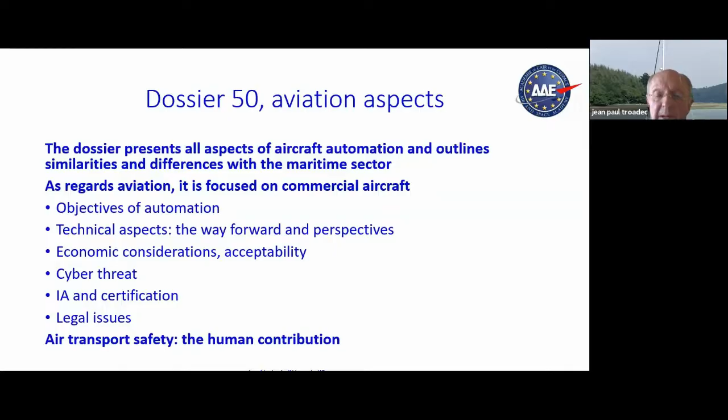As regards specifically aviation, it is focused on commercial aircraft and develops the following aspects regarding automation and autonomy: the objective of automation, the technical aspects, economy and acceptability, cyber threat, artificial intelligence and certification, legal issues, and as regards air transport safety, the human contribution, which will be presented by my colleague Bertrand de Courville after my presentation.

Next slide, please. The objectives of automation are the same since the beginning of aviation. The first is to assist the crew to manage increasingly complex systems and improve access to flight information. This has allowed a progressive reduction of the crew from 4 to 5 at the beginning of commercial aviation, to 3, and then today to 2 crew. The last operation eliminated was that of the flight engineer, thanks to the automation of mechanical systems.

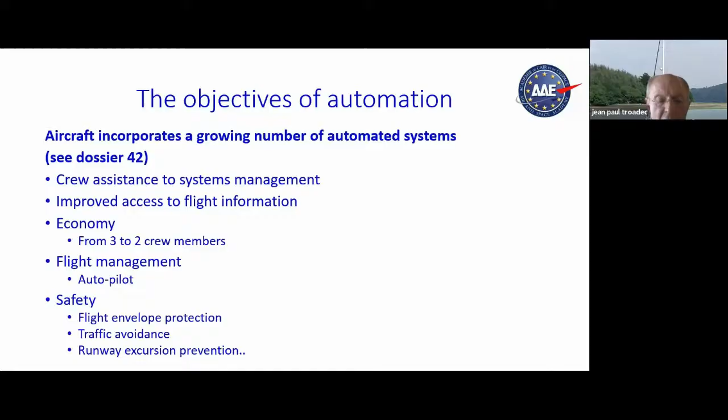Autopilot is, of course, an essential device amongst automated systems. Its functions have been progressively sophisticated, from simply keeping course and altitude to possibly managing the entire flight. Automatism have also developed functions devoted to safety, such as flight envelope protection, traffic avoidance, and runway excursion prevention, as Bertrand will develop later on. Next slide, please.

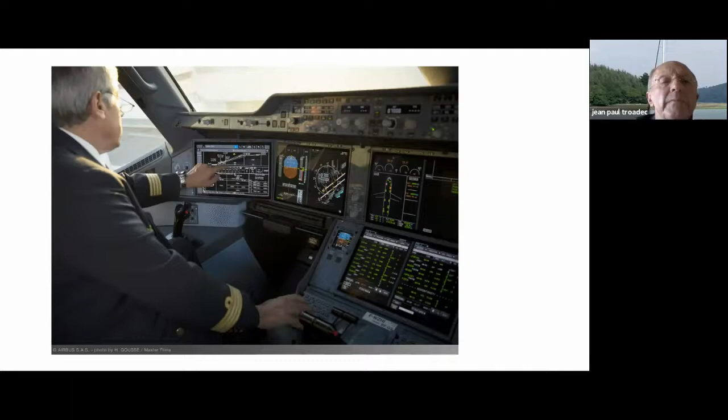Here you have a slide, a picture of the cockpit of the A350, which shows the graphic interface developed for this new version of the Airbus. And you can see the pilot dialoguing with the computer. Next slide, please.

What is the situation of autonomous civil aircraft today? As regards autonomy, the only so-called autonomous civil aircraft flying today are limited to light aircraft. I say so-called autonomous because, in fact, they are flown by a ground pilot. These aircraft are subject to strict limitations as regards their size, the airspace they can fly, with specific training requirements for the pilot, depending on their use.

Many larger drones carrying freight or even passengers are under consideration, but none is presently in operation. Most of them are electrically driven, devoted to urban mobility, and EASA is developing certification rules for this type of aircraft. On the picture, you have a picture of such a helicopter.

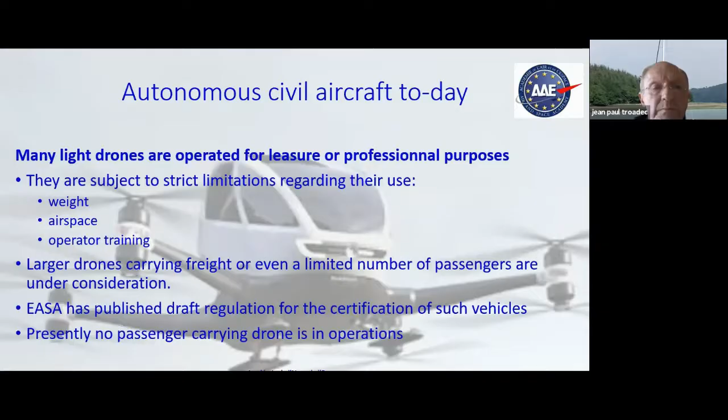Next slide, please. As regards military aircraft, on the contrary, armies still operate large drones for military and observation purposes. Some of them have the size of commercial aircraft. These aircraft fly in a specific framework compared to civil aircraft. They are subject to different certification rules, and they use specific airspace, and of course, they carry no passengers. Nevertheless, we can think that their experience will be useful for developing large commercial drones in the future.

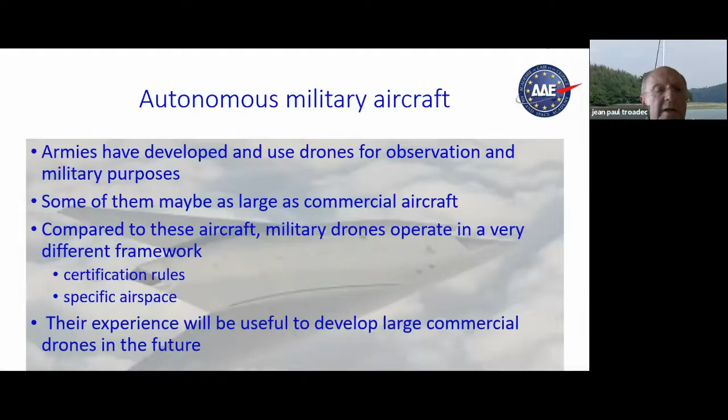Next slide, please. Today, all large civil aircraft are operated by a two-pilot crew. Is it possible to reduce the number of crew to 1 or even 0 without decreasing the safety level?

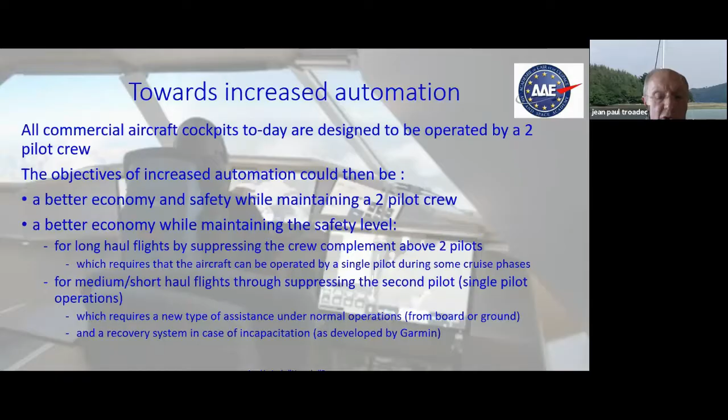Two ways are under consideration by the manufacturers. For long-haul flights, when a crew complement above 2 is needed, the perspective could be to suppress the third man, meaning that during some cruise phases, the aircraft can be operated by a single pilot for a limited time. For short-haul flights, the suppression of the second pilot should require a new type of assistance under normal operation from ground or board, and a recovery system in case of pilot incapacitation, such as developed by Garmin for business aircraft. Here you have a view of what could be a single pilot cockpit.

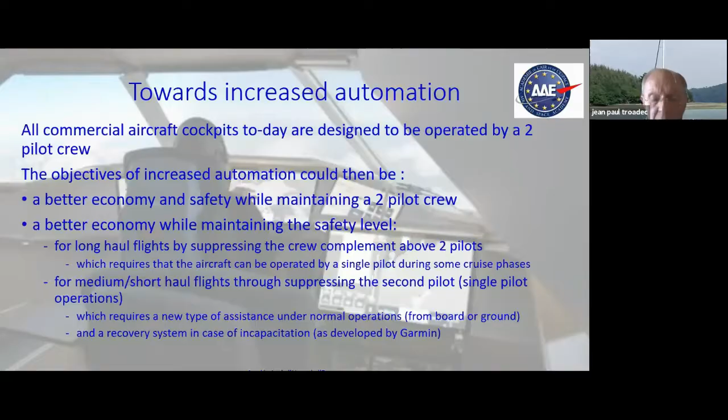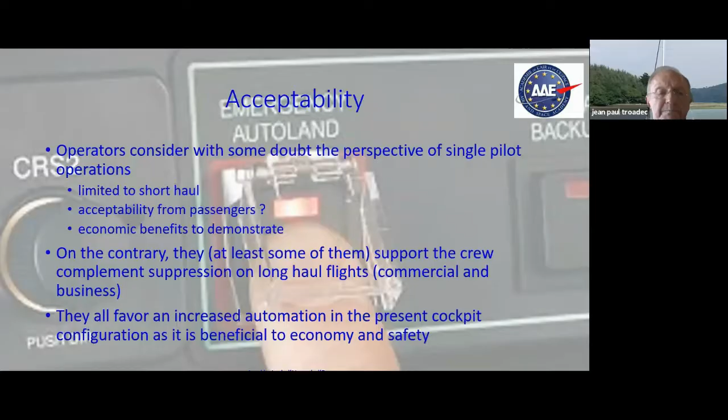Next slide, please. Single pilot operation does not seem to be a priority for most operators, in particular because the economic benefits are not demonstrated and the public acceptability is questionable. On the contrary, some support the crew complement suppression as long as safety is maintained, in which they see an economic benefit and a simplification of crew planning. Next slide, please.

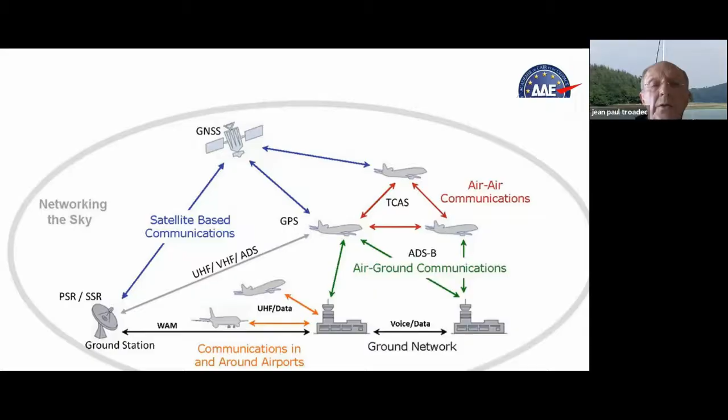This is a graph of the different interactions between the aircraft, air ground, ground station, and satellites, and it gives an idea of the level of threat, because there is a threat at each connection between the ground, the aircraft, and the satellites.

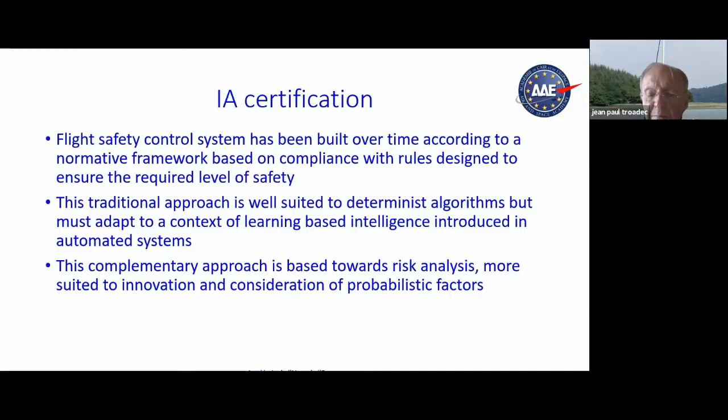Certification. The certification of artificial intelligence is a new problem for aviation, because the introduction of some level of learning-based intelligence, as opposed to the traditional deterministic algorithm approach, requires a complementary certification model. The normative framework based on compliance with rules designed to ensure the required level of safety must be complemented by an approach based on risk analysis more suited to innovation and consideration of probabilistic factors.

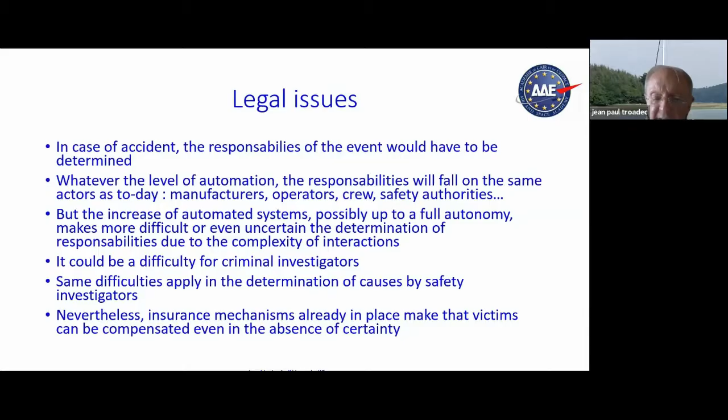My last slide refers to legal issues discussed during the conference. The question is the determination of responsibilities in case of accident, facing the increased complexity of interaction between the different systems and actors. The responsibilities will necessarily fall on the same actors as today: manufacturers, operators, safety authorities, but will probably be more difficult to determine.

This could be a problem in case of criminal investigation, the question being the same for the determination of causes by the safety investigators. Nevertheless, insurance mechanisms ensure that victims can be compensated even in the absence of certainty.

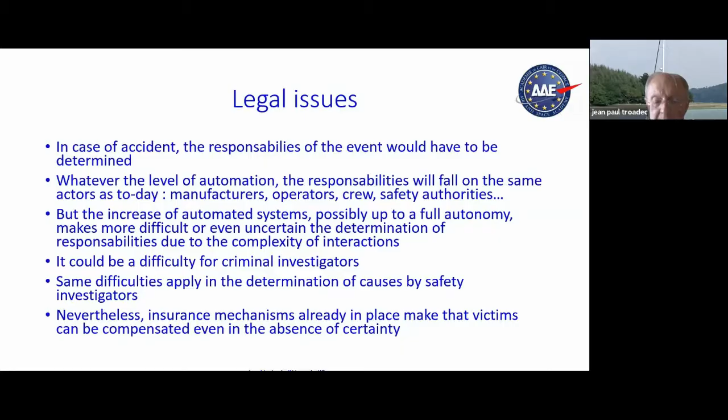My name is Bertrand de Courville, and I'm a retired captain from Air France. I've been flying for 30 years, and I was involved for about 20 years with safety issues at the Air France level and also at the international level. I made this presentation at the conference organized with Jean-Paul.

So when it comes to working on air transport without a pilot, it's good to look at what pilots do, and more particularly, what is really the pilot contribution to safety.

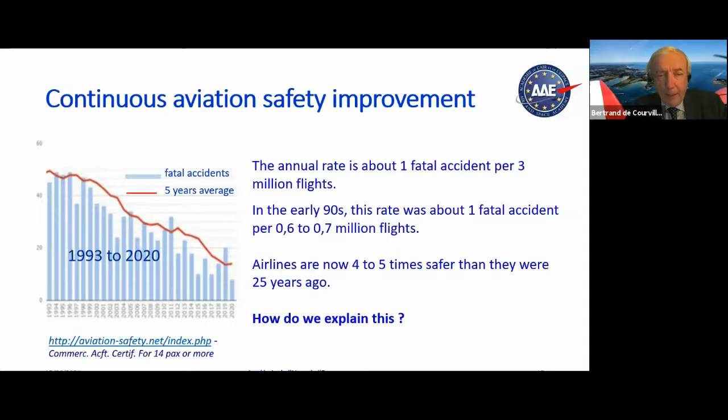What we see over nearly three decades, more than 25 years, is a very significant improvement of safety. Depending on what statistic we look at, airlines are now 4 to 5 times or even more safer than they were 25 years ago. The question is, how do we explain this?

One way to answer is to look at what changed in 25 years and what remained unchanged. About what remains unchanged: airplane reliability, no change. The planes are today as reliable as they were, nearly the same, no change. Failure, anomalies, poor weather are still part of daily operation as they were 25 years ago. Human errors, the same. There are pilots, air traffic controllers, maintenance, and many other actors making errors.

Something interesting to note is that, as it was 25 years ago, the critical safety decisions made in real time, short-term decisions, are made by pilots in flight. It's still the case today. Today, as it was 25 years ago, it's a two-pilot crew, as Jean-Paul mentioned just before.

Something few people really know is that 99% of landings are performed manually. The approach may be flown with autopilot, but in 99% of cases, the landing is performed manually. So every flight is a source and opportunity for training to fly and land manually in any kind of weather, with the exception of fog, where we require auto-land capacity.

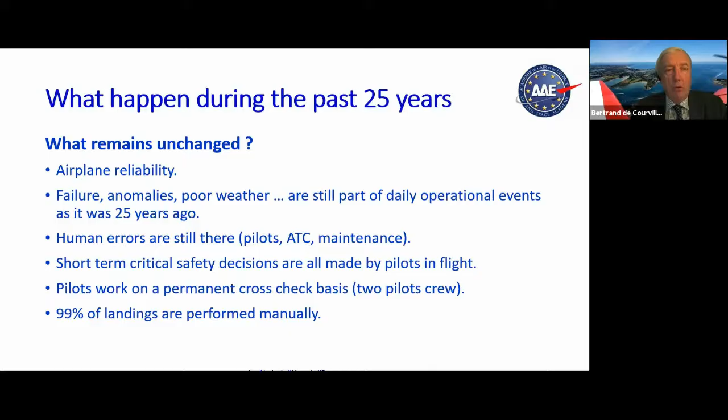So now, what really changed, and what could be the source of this very significant improvement of safety? We have, over these 25 years, really significantly improved the design of decision aids, mostly those related to specific risks, which were the major contributors to accidents. I'll say a few words more about that.

We have much more efficient teamwork today. Teamwork in the cockpit operates on a fail-safe mode, which is part of the concept of every aircraft component, but it applies also to the crew. If one component fails, the other one is there as a backup, and it's the same for the crew.

We have many sources of training that are more and more sophisticated. Initially, we had crew resource management training, as was the case in the shipping industry—bridge resource management. More recently, we have threat and error management, which is a very efficient way of addressing risk at a short-term level in the cockpit. We also have FORDEC, an acronym about how to make decisions in a critical situation, and we train the crew to work together with that, and also to get information beyond the cockpit when needed.

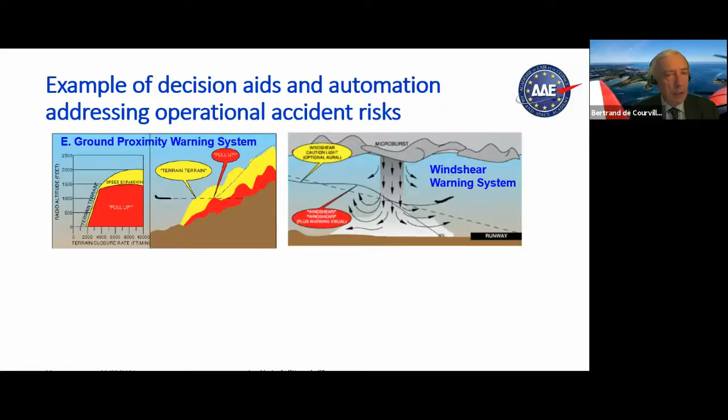We also have an important aid for decision making: the detection and avoidance of wind shear, which is a quite important risk source of loss-of-control related accidents. Wind shear warning systems now equip all aircraft. It's required by regulation.

Also, because those types of accidents are now really reduced, we have to look carefully at runway overrun and what we call runway excursion. There is now different equipment on board to inform the crew when there is a real problem of energy, either at touchdown or in advance, when the energy of the aircraft will be too high compared with the available distance or braking capacity of the aircraft. So it's again a decision aid to go around and try another landing.

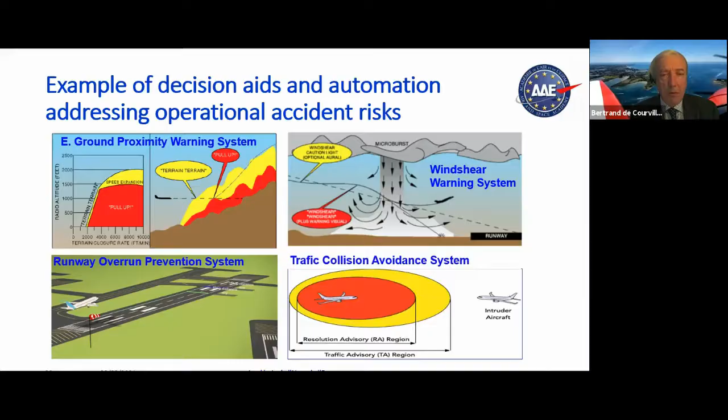And of course, the traffic collision avoidance system, which has been in place for about 20 years. Now it's connected with the air traffic control system, and air traffic controllers and crew are trained on a regular basis to bring the correct response to a traffic collision avoidance alert.

So the human contributions to air transport safety -- we used to think about and look at this model, which shows how today we understand accidents. It's not a single cause, it's a multi-causes model, where at the front line there are, of course, pilots and other frontline actors, but here we are talking about pilots.

One aspect I presented here is that having two pilots is a fail-safe concept. If one fails, if one makes an error, and if the crew is well trained and mature about that, the error will be corrected. But also we have this feedback process, which is well in place and improving today, and that feeds all the levels of the air transport system.

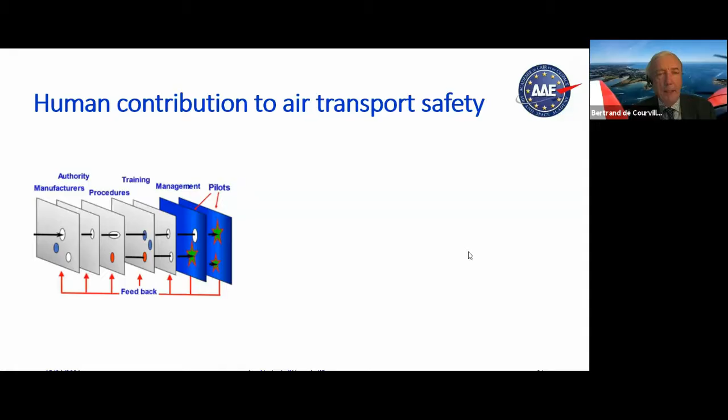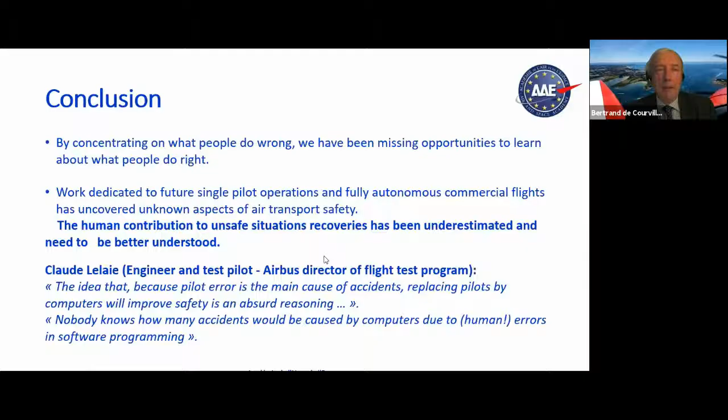So what are the pilots doing? Just back -- could you go back? Back. No. Could you return to the... Again. Okay.

Pilots are actors and witnesses -- a few words about what they are really doing in the cockpit. They are trained to manage any type of incident in flight and land the plane with its occupants, of course, in a secure place. They are empowered, in case of an unsafe situation, to abort a takeoff or landing, or to divert or to evacuate. They are there making the decision to do that, and they're trained for that. They are empowered to do that.

It's also interesting that they are independent enough to reduce the risk of biased decisions when it comes to cost or things like that. Biased decisions still exist there, of course, but they are quite independent. They are trained to be independent from those cost constraints and to make decisions really based on safety.

They are also trained as a team to detect and correct any errors, including their own. A young co-pilot learns to speak up when a captain is doing something wrong. And if they don't do that during a simulator session or a check ride, they will have bad marks. So they will be judged for that.

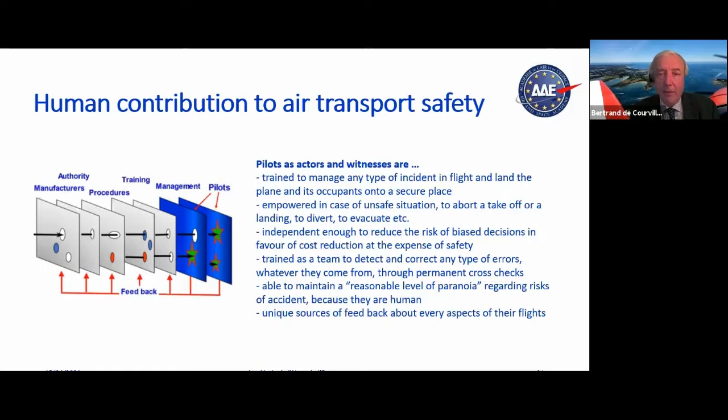This has to be managed by the crew sometimes on very short notice, and they don't have much time to make a decision. This is one of the main differences between air transport and other types of surface transport. When you are in flight, you have a limited time to go down and land the aircraft. We cannot wait for any kind of support or help. That's really the main difference in what we are doing in flight operations.

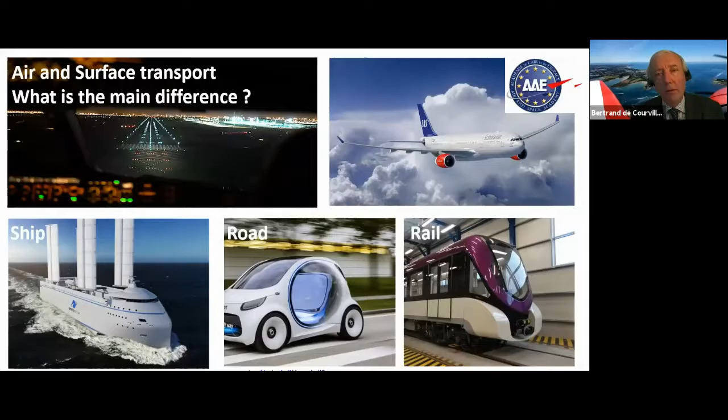As a conclusion, we could say that by concentrating on what people do wrong, it was understandable, and it's still the case, to explain accidents - but they are very rare. We have been missing opportunities to learn about what they do to have safe flights, what they do right. The work dedicated to future single pilot and fully autonomous commercial flights has uncovered unknown aspects of air transport safety. The human contribution to unsafe situations recoveries has been underestimated and needs to be better understood.

I would like to quote Claude Lelaie, who was an engineer and test pilot at Airbus, the Airbus Director of Flight Test Program, and in charge of the Airbus 380 program. He said that the idea that because pilot error is the main cause of accidents, replacing pilots by computers will improve safety, is absurd reasoning. It's quite obvious - nobody knows how many accidents would be caused by computers due to human errors in software programming, for example. Thank you.

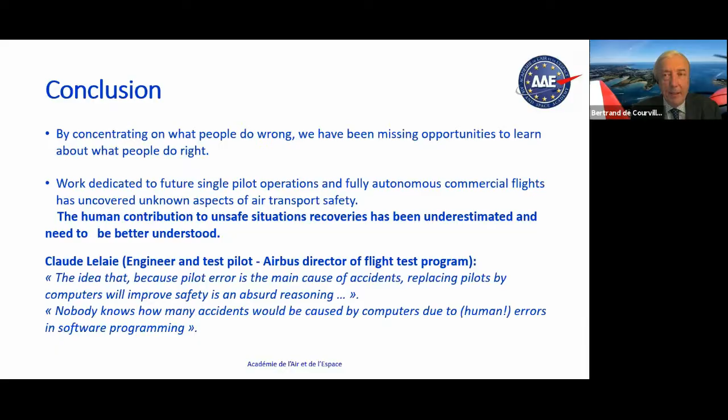While... Ah oui. C'est bon? It's okay. Alain?

Good evening everybody. It's my privilege tonight to speak to our colleagues from Sweden on the maritime aspects of autonomy and automation. In the maritime domain, the perspective of seeing autonomous unmanned ships sailing for commercial or military purposes has been contemplated for several years now. The International Maritime Organization, the IMO, has proposed a name for these vessels: Maritime Autonomous Surface Ships, or MASS.

Unmanned vehicles are already a reality in navies. Several unmanned boats are being used for surveillance or intelligence gathering. They are remotely controlled from the shore or from a naval ship. Mine warfare is one of the most developed warfare domains for unmanned vehicles.

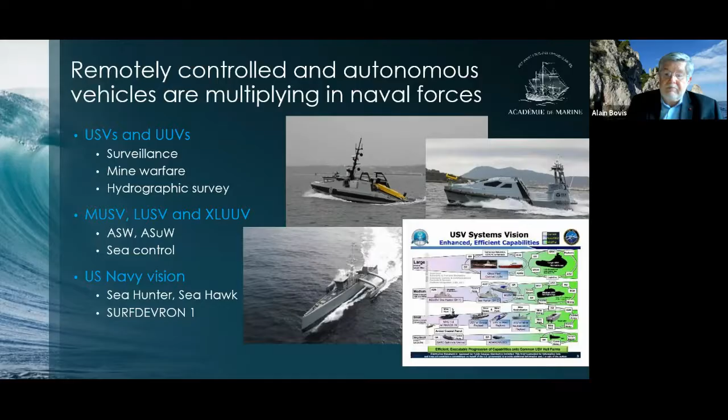Considering the civil sector, which is of interest for the industrial community and regulatory bodies, automation and autonomy need to be precisely defined. Different levels are defined according to the navigation area considered, for example short sea shipping or long-range journeys, the degree of automation, i.e. the decision-making share between embedded software and human operators, and finally, when the ship is remotely controlled, the degree of control from remote manual operators.

From remote manual control up to mere soft supervision, the feasibility of remote steering from a 1,000 miles distant virtual bridge was demonstrated last September 2020, when a French Navy oceanic tug was operated from a virtual control room located near Paris, 1,000 miles away.

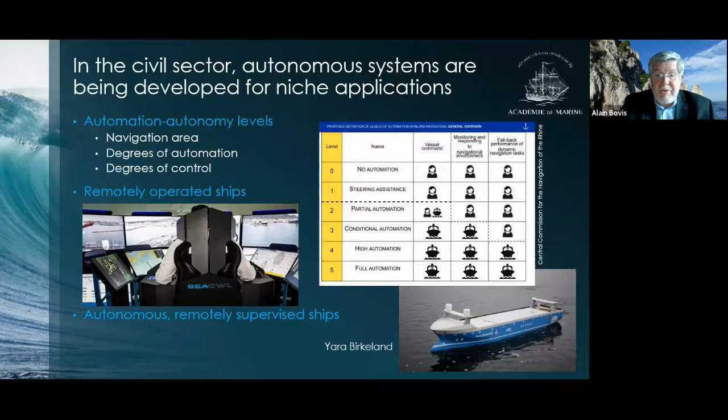Predictive big data analytics, Internet of Things, Internet of Services are new means to anticipate markets, to treat orders, traffic, sea state, and to optimize fleets, cargoes, routes, loading and discharging operations of the ships.

The shipping industry doesn't envision today, like the air transport companies, eliminating completely embarked crews at a large scale for long journeys. Instead, the maritime transport community is expecting significant benefits from increasing automation of ships and their operations. On the safety side, a potential reduction of human errors, taking into account that digitalization can raise new risks in operation. For the protection of environment, by optimizing the performance and powering needs of the ship's navigation and operation, and giving a competitive advantage to companies that move towards automated and autonomous shipping.

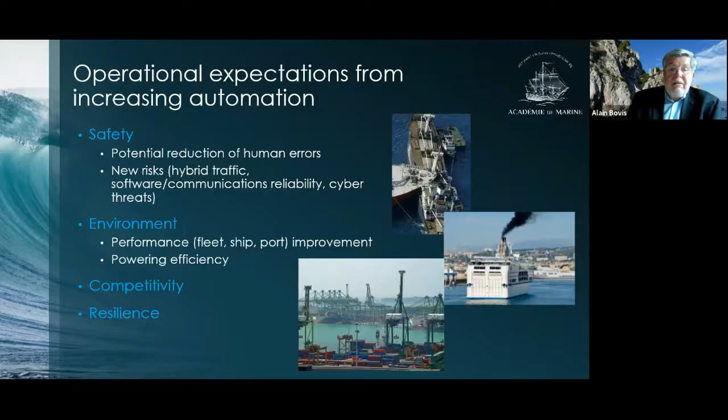More precisely, the economic objective of shipping companies is to achieve seamless multi-modal transportation door-to-door, including the seagoing segment but also other forms of land transportation, reducing useless waiting time, improving productivity of loading and discharging operations, and optimizing routes according to real-time weather information, etc.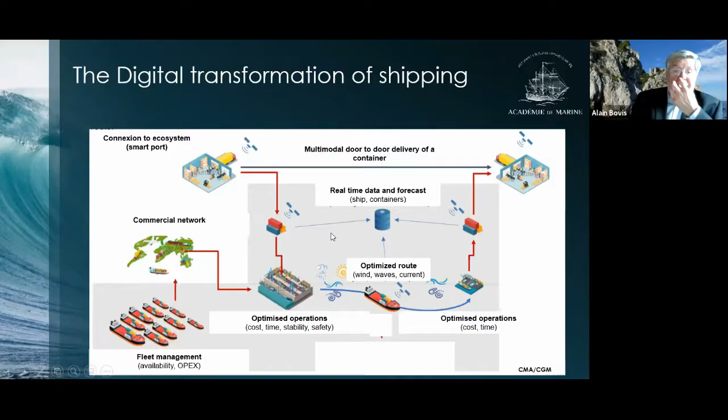Thus, automation and furthermore autonomy have to be approached in a holistic global way, from planning of missions to actual operation of systems and ship steering. So the whole chain of the concept of the system has to be taken into account at the same time. Any automated function must use data provided from other systems, automated or not, and itself has an impact on decision making in other domains. Thus, interoperability and interconnection of different functional systems have to be carefully taken into account.

Several hard points are still ahead of state-of-art technology. The maritime domain does not have, as much as aeronautics, the culture of quality software development, especially those related to ship safety such as navigation or stability. Existing software is often poorly documented and operators are not sufficiently trained to overcome software limits or deficiencies. The performance and integrity of communication and data links between the ship and the shore are crucial.

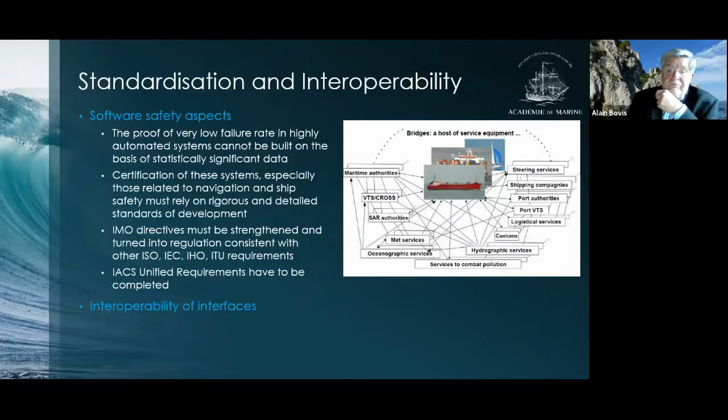If we talk about safety, the numbers of shipping accidents and ship losses are decreasing over the years, but this number still remains to be further reduced. It is said that most accidents are related to human errors, which can be navigation errors, poor maintenance, inappropriate handling of cargoes, or others. Of course, these accidents could be avoided with automated systems.

But as was said previously, digital technology may also introduce new risks, especially when human operators interact with automated systems and they don't understand each other.

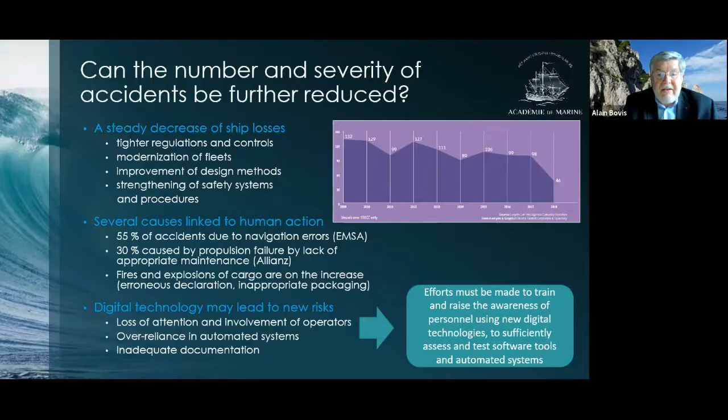One of the major new risks brought with automation are cyber risks. We all have heard about recent spectacular and costly cyber attacks on shipping companies or port terminals. Recommendations and regulations are being developed by IMO, ISPS (International Ship and Port Security), the European Union, and classification societies. This new regulation and practice are to be applied by all actors, the operators but also the software developers. And a long way is still to be done.

Fleet and port operation centers already established in each shipping company are planning and monitoring operations of the fleets. With the proliferation of onboard sensors, satellite observations, and data links, onshore control centers receive infinitely more data than the ship and its crew can process in real time. With automation and reduction of embarked crews, these centers will take an even more important role in ship navigation, propulsion regime control, loading, offloading, maintenance, etc.

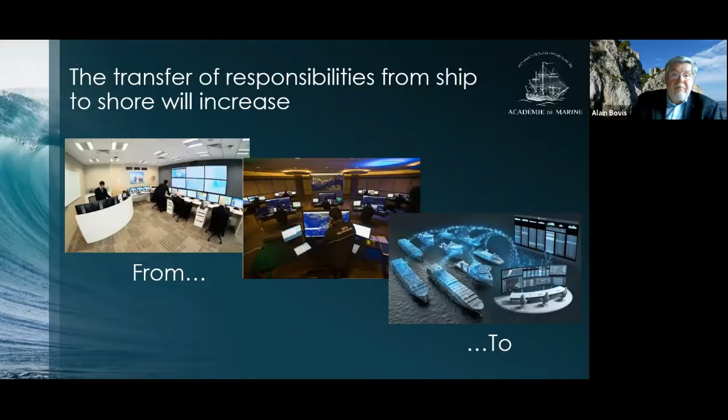Let us talk about ports. Ports are logistical hubs in the transport chain. Nearly 50,000 ships transport over 11 billion tons of goods each year through the ports. A port is a complex area involving many players, and the development of digital technologies is profoundly changing the relationships and respective responsibilities between these different actors.

The question is, each actor is developing its own digital systems, but will these systems be able to talk together with standardized interfaces? This is the question.

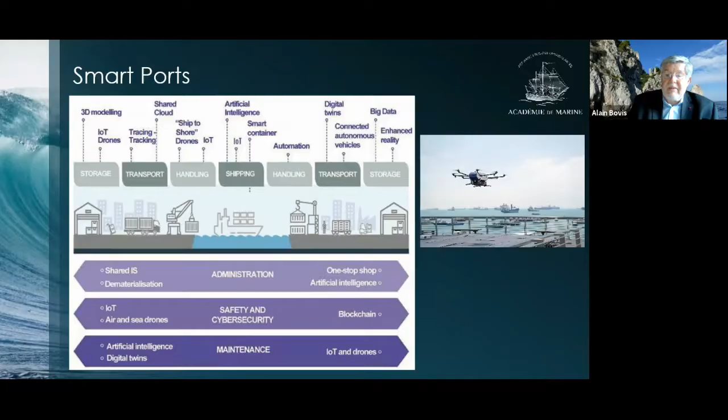From the social point of view, a recent study from the World Maritime University in Malmö, Sweden, shows that automation will not reduce the global demand for personnel in the maritime activities and industry, but the nature of many jobs will shift from embarked physical work to ashore office work. Such new jobs may be more attractive for young or female students, but the challenge will be how to transmit to this new personnel the seafarers' experience when they will have less opportunity to sail.

According to a recent survey, the digitization of maritime transport raised a strong social reluctance. According to a recent survey done in France, 84% of seafarers questioned believe that automation is a threat to their jobs, and 66% of them think that the introduction of new technologies holds no benefit for maritime transport, which shows that there is a long way to go to convince all the actors and trade unions of this evolution.

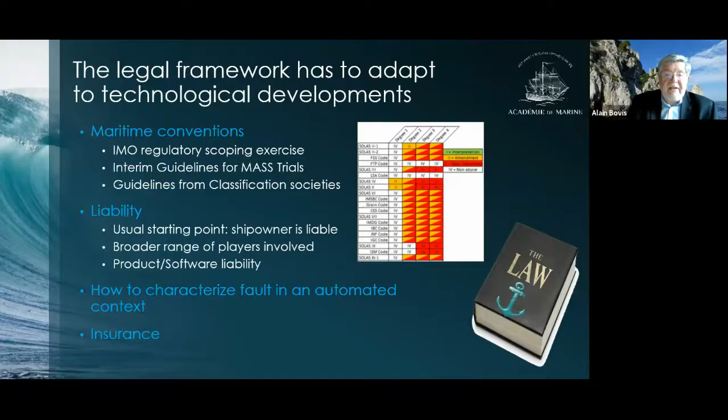Last slide, please. Okay, this was my last slide. So we are open to questions if you have some, and we will be pleased to try to answer.

So the floor is open. Who is bold enough to ask the first question?

Now a question from Sweden, Anders Grenstad here, but thank you very much for very interesting briefings. I learned a lot in just listening to you and seeing all these slides. But as a question, how long time...